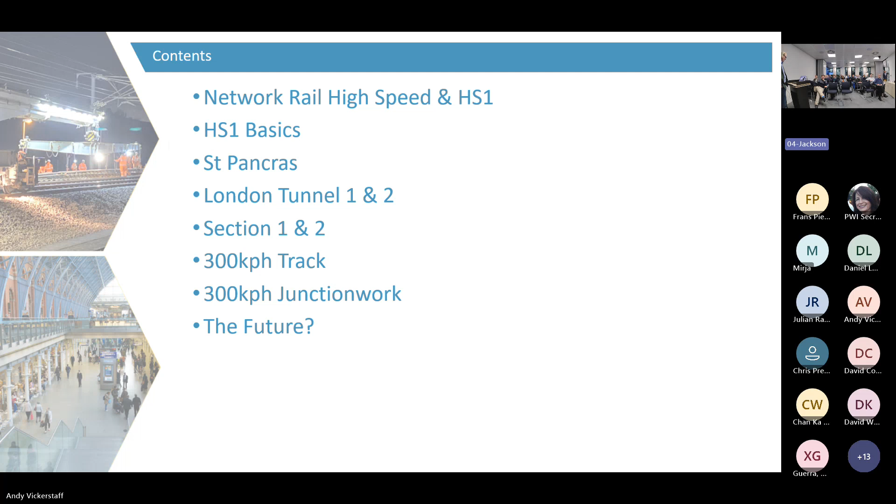A bit around some of the basics of HS1. This is set out so we'll work our way from St Pancras down the line, through the London tunnels 1 and 2, what we refer to as section 1 and 2, which you'll no doubt learn about. What's 300 km an hour, or 180 miles an hour - I'll be metric all the way through because it's a metric railway - what's the track, what are the kind of challenges of that, how do you have junction work at 300 kilometres an hour.

This had to be explained to me as well, but I don't work for HS1. HS1 are owned by these two hedge funds, I guess. Don't ask me about that either.

But HS1 have a 30-year concession to run the railway, which is now generally known as HS1, or probably most of you remember it being called CTRL, Channel Tunnel Rail Link. Under that there are lots of other stakeholders, but the three big ones are us - we are Network Rail High Speed Limited - and two major operators, Eurostar and Southeastern, operating international and domestic services.

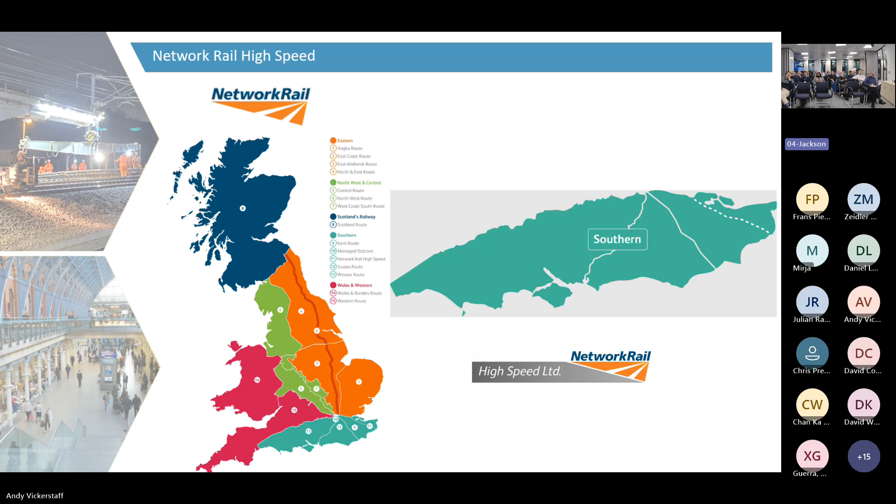So where do we fit in Network Rail? I'm sure many of you are familiar with the regions. We technically sit on the southern region, with Kent, Sussex and Wessex, and this dashed line is us, because although we run through Kent, we are a completely separate company. We are Network Rail High Speed, but we're a wholly owned subsidiary of Network Rail. Don't ask me any more complicated questions about how the financing works.

So HS1, what are the basics? 109 kilometres, that's Pancras International down to the boundary with Eurotunnel, where Eurotunnel, or GetLink as they're now called, takes over. We don't go to Paris - GetLink run the bit from this side to the other side, so if you get your car on the shuttle, that's their bit through the tunnel, and on the other side it becomes SNCF, what's generally called Line 1, the northern line into Paris, servicing Brussels too, which you probably saw on the opening day of the Olympics, or learned about the high-speed network in France as 3 of the lines were taken out. 109 kilometres, 0 kp starts at Pancras, down to 109.9 technically.

Maximum speed, 300 kilometres an hour, 180 miles an hour. 4 stations on the line, 3 of them are NRHS managed - we manage St Pancras, Stratford International and Ebbsfleet International. Ashford is not run by us. Again, don't ask me complicated questions.

2 operators: class 395, that's domestic, Southeastern trains, and class 373s, 374s, the Eurostars, international trains. In terms of gauging, it's gauged to UIC GC for freight at 140 kilometres an hour, and UIC GB1 for passenger at 300 kilometres an hour. 79 sets of NR60 or R260s, whatever you want to call them, what you'd probably see as a standard switch on Network Rail, and then 62 high-speed Vossloh swing nose crossings, which I'll talk about a bit more.

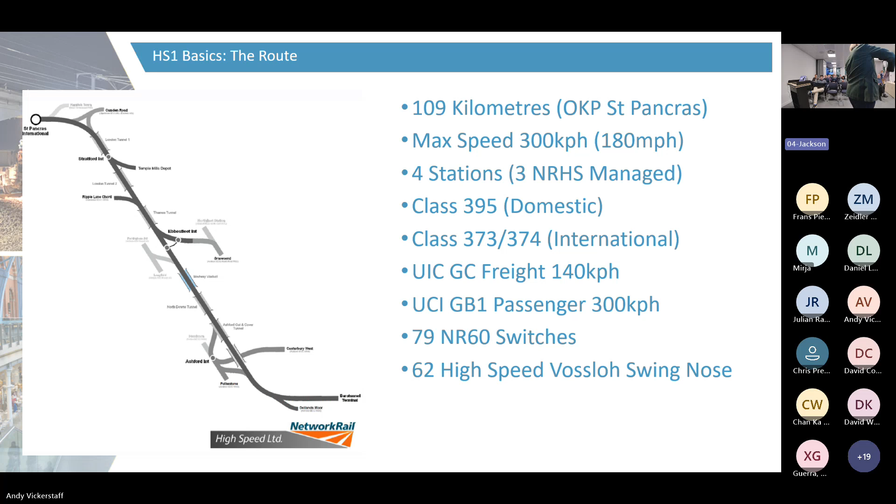So what's the basics? Permanent way - nice glossy photo of some track. I'll talk a bit more in detail about the track, but it's 25 kilovolt overhead line. Everything that runs is an electric train other than some freight. There are currently no freight operations, but we are open and able to take them - they are obviously diesel.

25 kilovolts, twin block sleepers made by Stanton Bonna, original sleepers. One of the great things I was very excited about was that you'll notice there's not a tree in sight, so autumn doesn't really bother me, and having come from the Piccadilly line, that was a great joy. Engineered embankments, lots of the basics are basically very good. It's effectively built almost as an extension of the TGV network, which is why a lot of our signalling and a lot of our suppliers are European suppliers supplying into the European high-speed network.

So, basics. It's Stanton Bonna twin block sleeper, which has nothing in the middle, but it does have a connecting bar in the middle, and ballast fills in between. It's 60 E1 rail, often ground now to E2, but it's pretty much all original rail, so it's all E1. In the tunnels, it uses the same sleeper, but in this embedded booted sleeper design, though it's effectively the same design. Slab track is a Satiba 312V, which we'll talk about more, and there's a Pandrol Vipa in the St Pancras slab, but the main fastening system is what's called the Vossloh W14, which is used on all the sleepers.

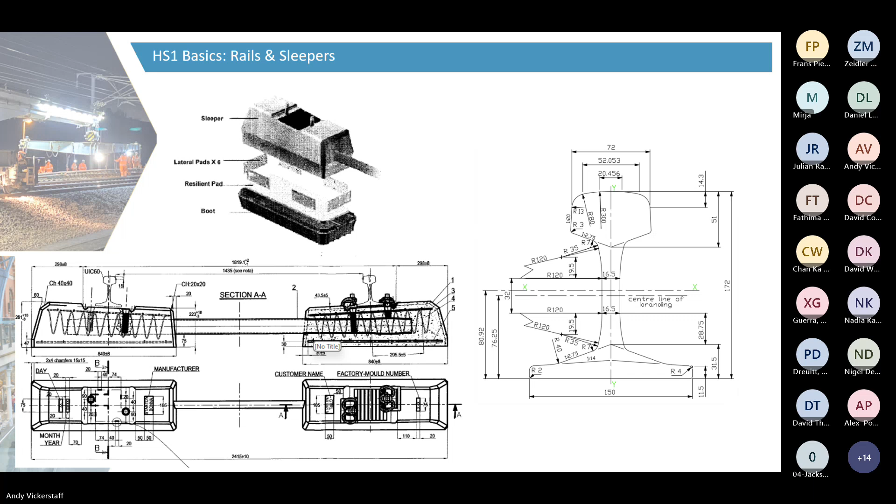So in terms of signalling, it operates with two different signalling systems. One is generally referred to as KVB - the reason it's KVB rather than CVB is so it doesn't get confused with control. Essentially, this is what you would know as fixed coloured signals with lights that go red, green and amber - fixed aspects, sorry, I'm not a signalling engineer.

With AWS or TPWS, mostly TPWS and ATP - and again, this was quite a shock to me - it's all within the low speed areas basically. It's still got 6-hole IBJs mostly, a couple of 4-holes. But that's within St Pancras, where the maximum speed is 80 kilometers an hour, not that any train ever gets up to it, but we'll talk a bit more about that.

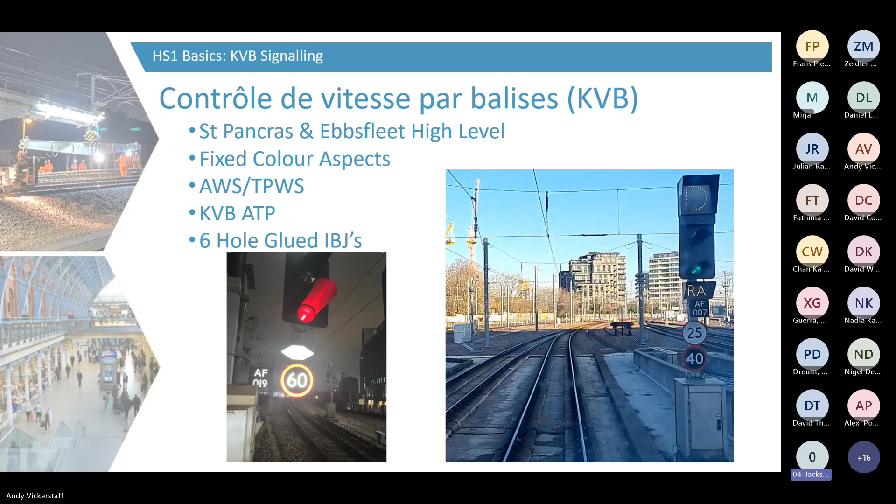These are called the block markers. They're about 1,500 meters long, 950 meters in the slightly slower speed section. Essentially, this is what the driver will see in the cab, telling them what speed to go, or telling them that in the next block you need to be ready to slow down. So effectively you go from one block to the next, one tells you to slow down ready for the next, and it changes and flashes. One of the great joys I discovered on about my second day is that the whole signalling system is completely bidirectional - we can turn the whole thing round, which is very useful in certain instances where you've basically got an up and a down, but we can run the whole thing backwards.

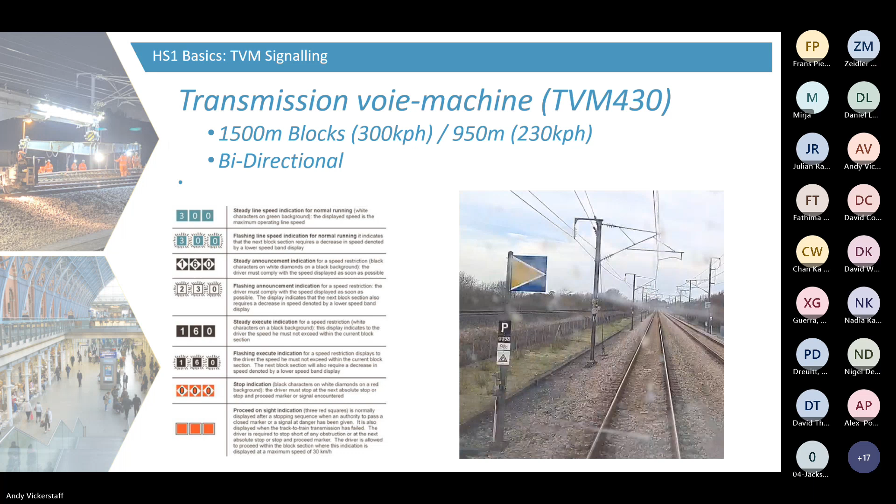So Eurotunnel opened in 1994, and then Section 1 opened in 2003. Section 1 takes you from the Eurotunnel boundary up to what we call Fawkham Junction, when Eurostar services ran into Waterloo. This was before HS1 was built, and when all the press was saying, why can't our trains go as fast as they can in France - because you haven't built a high-speed railway yet. It's called Fawkham Junction, and then Section 2 in 2007, which essentially takes you from Ebbsfleet up to St Pancras through the Thames Tunnel and the two big London tunnels, which we'll talk about.

But so really, when you think about it, obviously all the Eurostars go from St Pancras all the way down. So in terms of tonnages, that first kind of section runs about 20 million gross tons, about 10 million gross tons, and this bit at the bottom is about 6 million gross tons. So not huge tonnage, or certainly for me, I was overjoyed at how low the tonnages were.

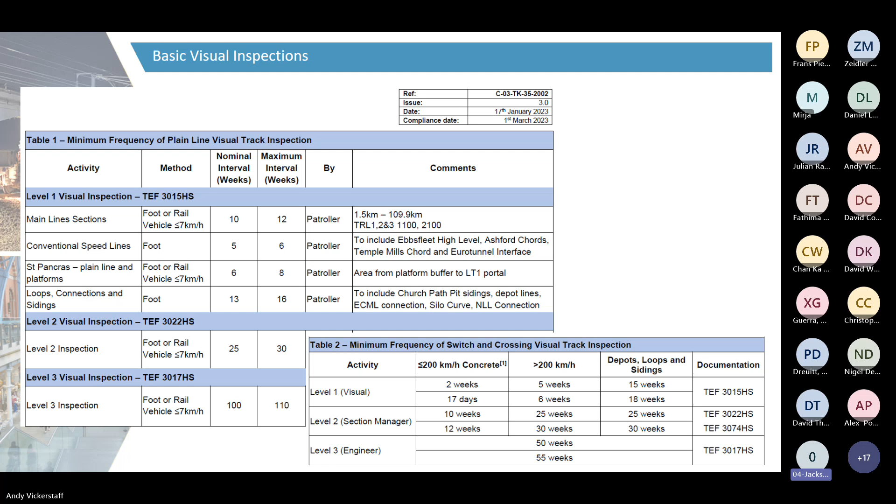Ultrasonics runs every 16 weeks. It's probably a bit overkill, but I have to work on that because we have very few defects at the moment. But yeah, in terms of, you know, when you came from a railway where you were sometimes doing 48-hour patrolling, it's quite a different beast.

So let's start at the top. So St Pancras, this is platform 6. This is the buffer stop, that's where our 0 kp mark is, so everything starts from there. It's a mixture of domestic and international platforms.

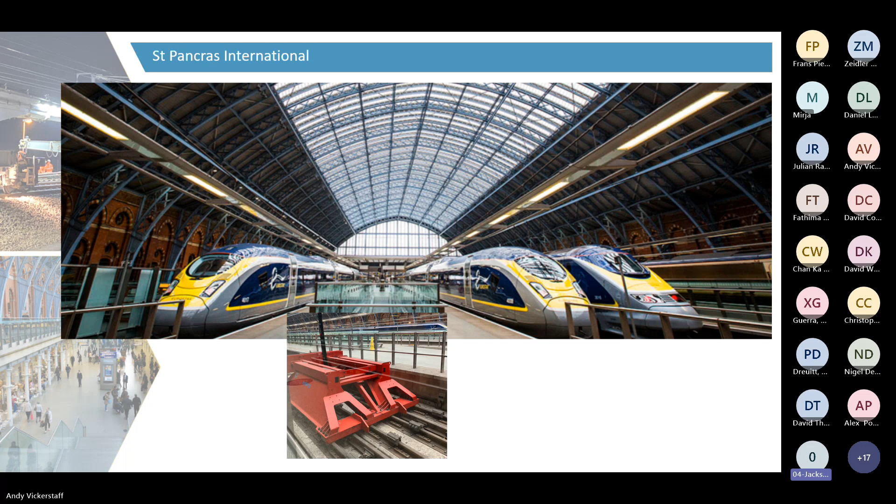Yeah, you can obviously see the original part of the station. There's obviously a lot of work to extend it out the back.

What I really want to talk about, because this leads to a lot of issues, I kind of think about it as at least 2 different railways, if not 3 different railways. So you've seen there's kind of 3 different tonnages, but there's also 2 different signalling systems. And one of the biggest functions is effectively we run a south-east running railway, yet we have a north-facing terminus.

So at some point, you have to get all the trains into a north-facing terminus. So some of these curves, these are about 400-metre radius curves around here, which for a high-speed train - I'll talk about that a bit more - that's a pretty tight curve. So a lot of issues arise, but essentially that is what we have to live with.

The same goes for lots of interfaces here. So effectively, this is King's Cross. This is where we cross the East Coast Main Line, normally referred to as the tin sheds, that goes over. But we also have connections with the East Coast Main Line, and I'm not going to talk about it too much, but you can actually get onto the West Coast Main Line or to Euston just down here. So, you know, there were things that could have been done.

As I say, so there's 400-metre radius curves kind of coming through here, and standard, most of the switches are C's and D's, so they're quite tight relatively for a train which is a high-speed train, which we'll talk about a bit more. So this is kind of the junction work layout.

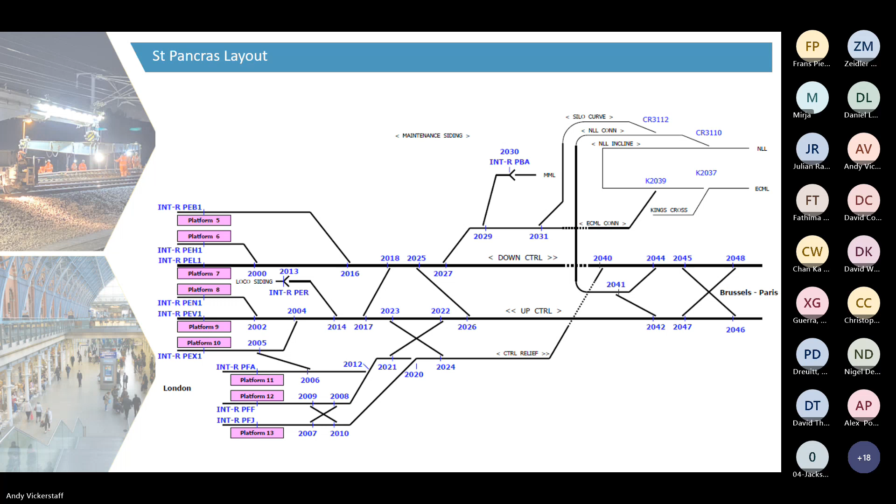So at St Pancras, this is again for me like flange ways of 150 mil - I thought, oh, this is so easy. This is the tin sheds with the big crossover, where there's a floating slab track. So it's ballasted track onto a floating slab track, then into slab track in the tunnels, and ballast beyond that.

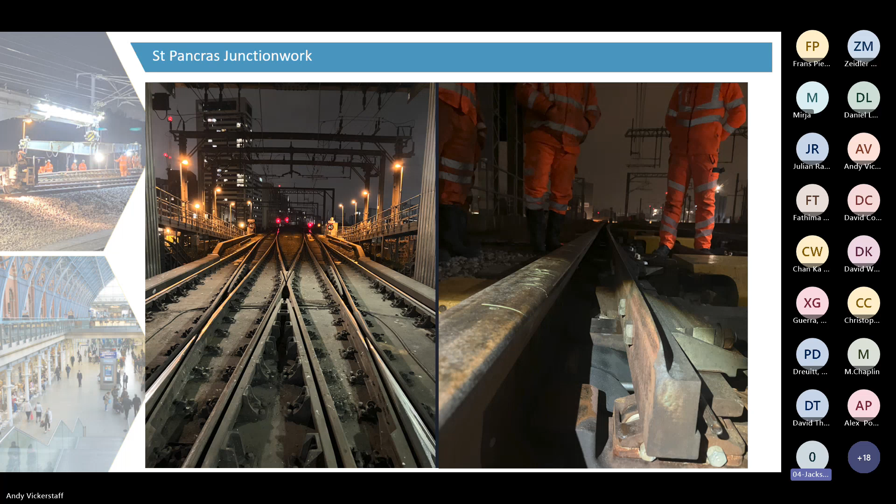We suffer from a lot of issues at St Pancras because the class 374, the new Eurostar, has a very stiff suspension because it's a high-speed train, and to be stable at those speeds, you need a very stiff suspension. But when you try and get into St Pancras, it rips everything to pieces. The old 373, if you've seen them, had a shared bogie in most of it, so it's actually quite soft for a high-speed train, relatively.

And the 395 - we'll talk about one particular issue - is kind of a compromise high-speed train because it operates on our line, but also has to operate on the rail network, so it's a balance. We get lots of 053 failures, so we follow the same standards in terms of switch inspections within St Pancras with RT60s.

We actually had a failure on Tuesday night, fresh off the press. This was what I was doing last night because I'm the only one who can do the mini prof at the moment. Fortunately, it was in the sidings, so it wasn't an issue, but I couldn't really work out how we had a failure on a set of points where a train hasn't been over it for a year.

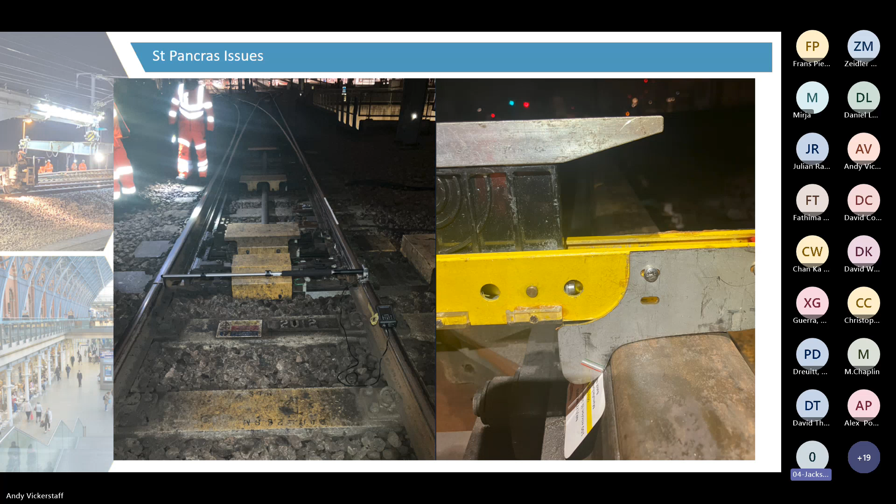Lots of issues. Those of you who are former colleagues will see that I was really delighted to find this stuff when I arrived. Vanguard in the platform doesn't seem to cause me any problems, fortunately.

There's also some interesting alignments - I don't know whether it really shows on this photo, but there are some really interesting design alignments around St Pancras, because of trying to squeeze as much in as you could to give you that kind of flexibility.

We spend more time probably at St Pancras in terms of maintenance than anywhere else because of all these kinds of issues. But fortunately, it has a benefit of at least it's all in one place, so we can get there.

Another great experience for me was you can just drive your car up onto the road and park right next to it. You don't have to abandon it in the middle of somewhere and wonder whether your car will be there when you go.

I enjoyed that. So lots of grinding, lots of 053 failures, where we wouldn't do inspections up there without grinders being available because we'd be banning facing moves all over the place - which, as I told people, is because you can't get a high-speed train around those kinds of curves without causing wear.

On my first day, the ex-colleagues are going to enjoy this story. They said, 'Oh, I got some really bad corrugation at St Pancras,' and I turned up and went, 'Is that it?'

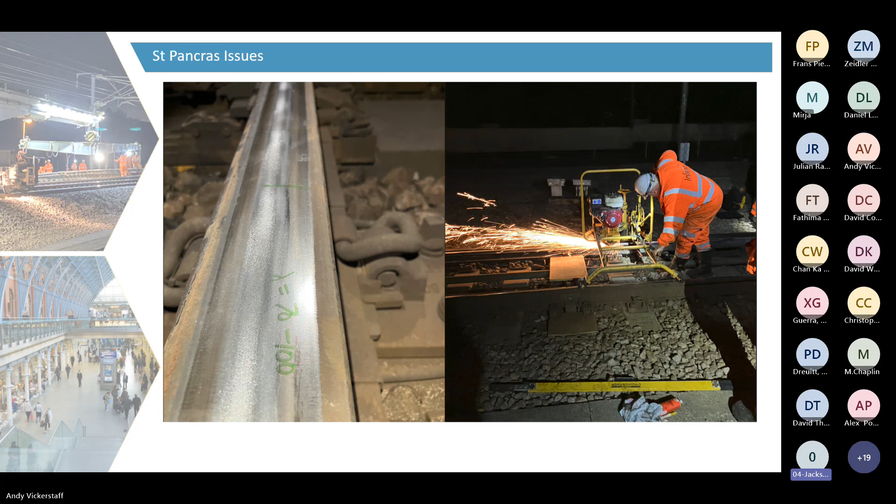But there are a few issues, a few spots up there, but again, nothing like what I'm used to.

So when we come out of St Pancras, we hit London Tunnels 1 and 2 - single bore concrete tunnels, where you go from the ballast onto this kind of booted sleeper effect. London Tunnel 1 is about 7 kilometres, and that brings you into Stratford, where you come out in the open air again into what we call the Stratford box, and then you get back into London Tunnel 2, which comes out pretty much by the Dartford crossing before you go into the Thames Tunnel.

When you inspect long tunnels, we have motorised trolleys, or lumicarts as they're known. I was sceptical of what you'd see, but you actually see quite a lot. Fortunately, because it's not brand new, but relatively new, there aren't that many failures - you're not looking at lots of missing clips, missing pads, that kind of stuff. I'm amazed how much you do actually see.

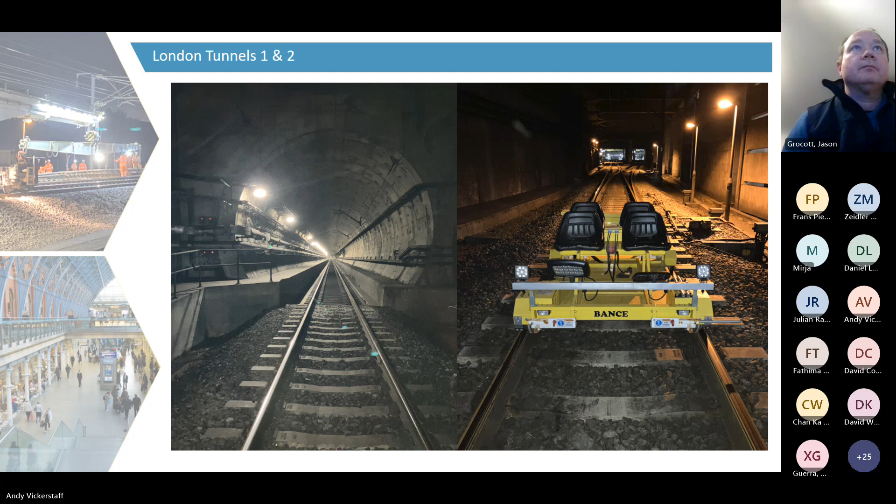So that gives you a bit more of an idea. There's a walkway down each of the tunnels, so again, in terms of evacuation, you can get people out. There are head houses about every 3 kilometres through the tunnels for emergency evacuation.

One of the first problems I arrived to was reports of trains hunting in London Tunnel 2. I did a bit of digging, and some colleagues in technical authority sent me an article saying this has been an issue since the trains were first introduced. As this article says, it was solved - that was October 2010. But we still seem to have issues with hunting in the London tunnels here.

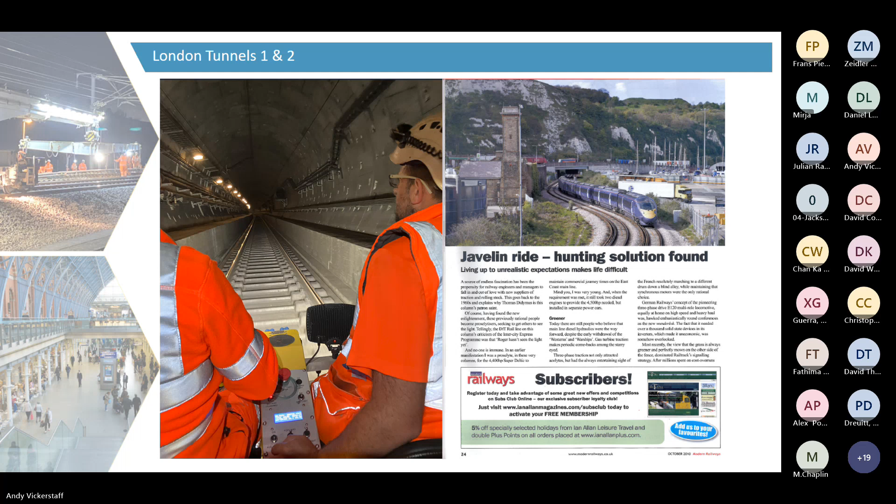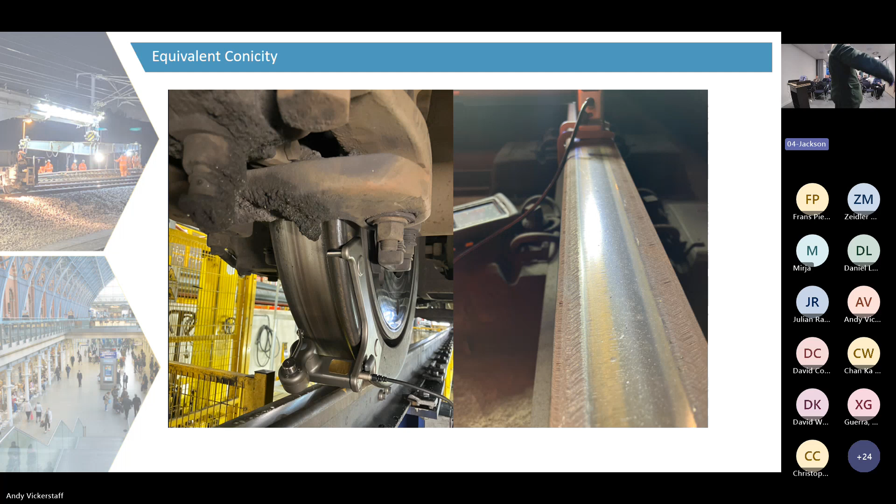With my background, I thought it would be a function of the equivalent conicity. So we need to measure some wheels and we need to measure some rails. So I went and measured the rail profiles in the tunnels, talked about how we identified it, and then went and measured wheel profiles as well.

What you all now have in your pocket is an accelerometer, a 3D, 3-axis accelerometer. So I said, tell me the units that are getting reported, and I will go sit in the train with my phone on the floor, which very helpful members of the public like to tell you your phone's on the floor. And we were able to pick up the units.

This graph has time on the x-axis, and this is just the lateral acceleration. The orange line is a train which does not hunt, and the blue one is one that does. Hopefully you can see the difference - it's quite violent, I'm not going to lie. It lasts about a minute, but the reason I needed a train that didn't hunt is so I can align the curvatures, because off the traces I can say I know exactly where I am and then realign them.

This is zoomed in just to show you, and when we worked it out, it's about 5 hertz, which is quite high if you read a lot of hunting studies. At 210 kilometers an hour, which is what this train is doing, that equates to about an 11-meter wavelength. Quite high. But we had identified where it was at least.

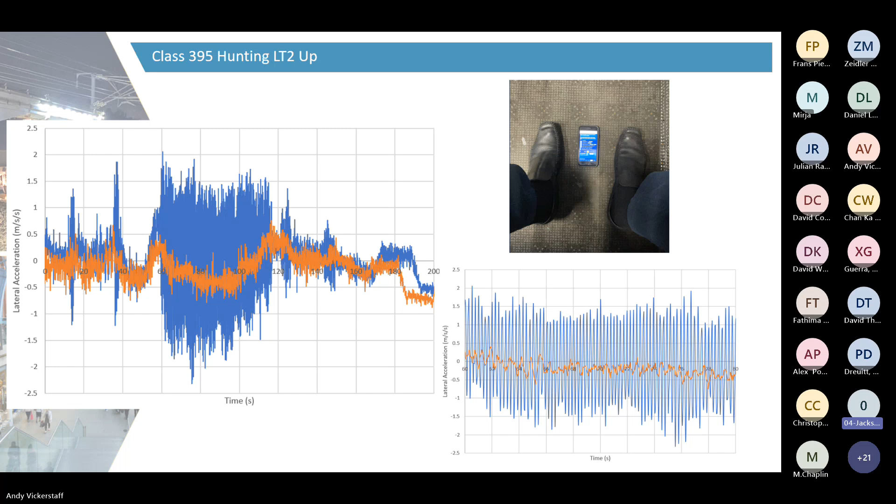When I took the rail profiles - normally, I'll try not to give you a whole wheel interface lecture, but it's normally a function of the wheel shape, the rail shape, and the gauge. Because if you tighten up the gauge for a very small lateral shift, you can set the train off hunting, right? So I said, okay, let's measure the gauge.

I looked at the TRC, so we just use the normal rail TRC to run, and I looked at the data, and it showed a bit of tight gauge. But any of you who work with these trains will know there's quite a variance between trains. In 2024, it was telling me it was 3 mil tight, but in 2021, it was kind of about 2 mil tight. My manual measurements hopefully follow a similar pattern, but they don't necessarily show the same absolute values. So I think there is a bit of tight gauge, but I suspect it has been there since construction, which I haven't been back through yet.

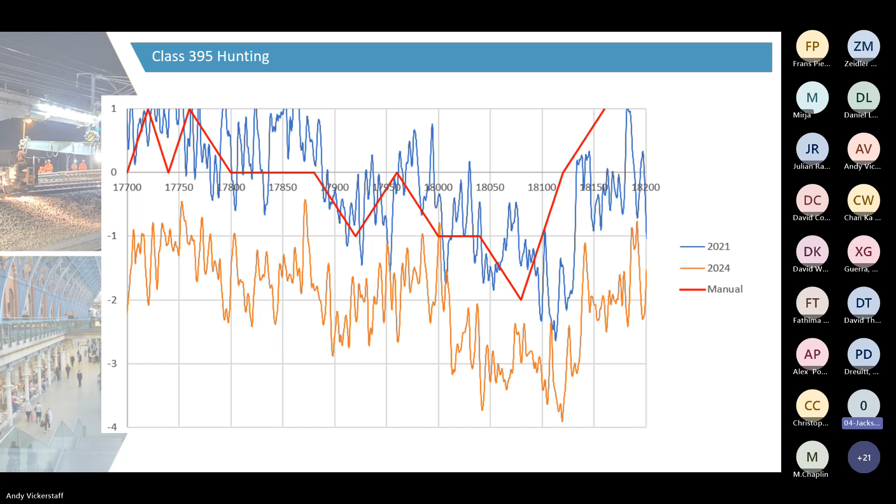When we measured the wheels - I said on my first day, I will eat my hat if they haven't got hollow wheels. And this unit is about 50,000 miles, just about coming. This one is about 180,000 - no, let's get my numbers right, 129,000. So it's about a mil and a half hollow. So there is some slightly tight gauge, but well, you might want to turn your wheels a bit more.

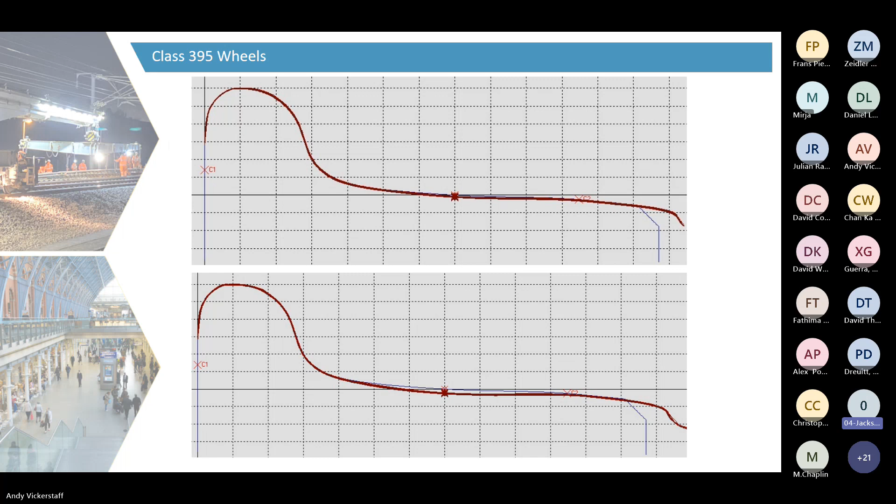Once I worked out that I now had this 3-axis accelerometer in my pocket, I started going on other trains. So that I don't have to talk all the time, I thought we'd play the game of which mode of transport is this - I've given you the axis. My phone is effectively aligned so Y is pointing forwards, that is positive, X is lateral.

This is the lateral acceleration - apologies, wrong color there. And I've given you a speed profile of this mode of transport, just to try and help you work out what mode of transport this is. Given it's a railway that hunts... Docklands.

We have an office in Stratford that I often get to via Lewisham, and there's quite a long straight there, which I know is a common problem with DLR straight hunting. I recorded one train - this is a rough calculation, I'm sure you all know this, and I can see Tom's here so he'll tell me I'm wrong - but it's more like 1.5 hertz. That wavelength comes out about 9 meters. Is that about right? Yeah.

The kind of example I use is the class 395. It's a compromised train - it's a high-speed train, but it's actually got a relatively soft bogie. The DLR is the other end of the scale, with an extremely soft bogie and very low speed, but in order to get around those 40-meter turnouts at Poplar. So the 395 is the other end of the scale, but it's effectively the same issue - at a certain speed, all trains can hunt and can be activated by equivalent conicity.

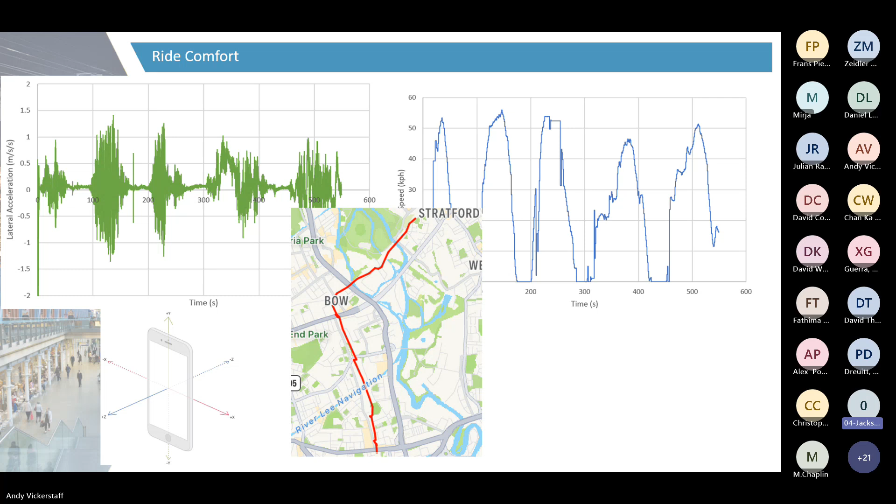This one is another one - I couldn't quite plot them all on the same axis, but look at the Y acceleration if you want to try and work out what this is. This is not a railway. Bus? No. Motorbike? No. Cycling? Only way out of this is... it's a plane taking off.

I was going to Frankfurt for a wedding, and the air stewardesses look at you very strangely when you put your phone on. Luckily, yeah. I went to a conference a couple of years ago all about ride comfort, and at the time in my role in LU I concluded I don't really care, and that's basically because there is so little you could do about it - speeds are much lower.

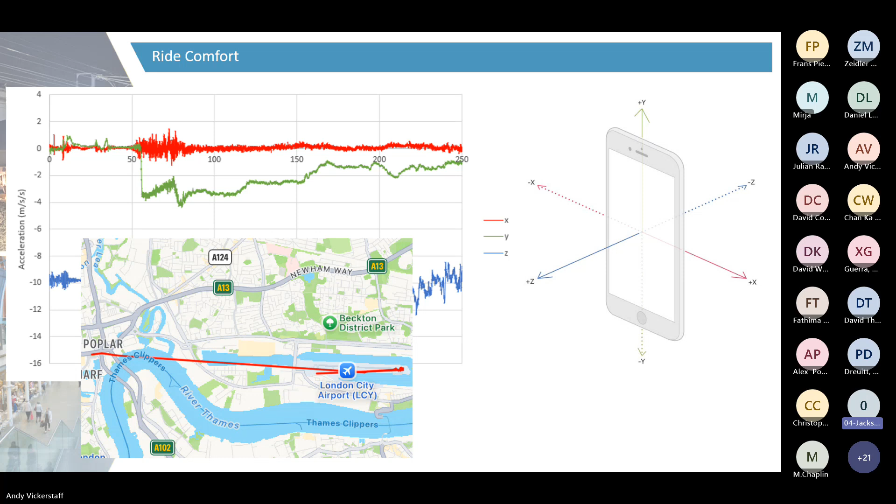I always had this argument with Malcolm Dobell, who many of you know, that we should change the braking rate depending on the time of day, depending on how cramped in people were, because when they're cramped in they're not going anywhere even if the longitudinal braking is very hard. But anyway, this is quite fun just to show you - when you take off in a plane, this is out of London City so it's quite a small plane, but you're kind of getting 4 meters per second longitudinal acceleration.

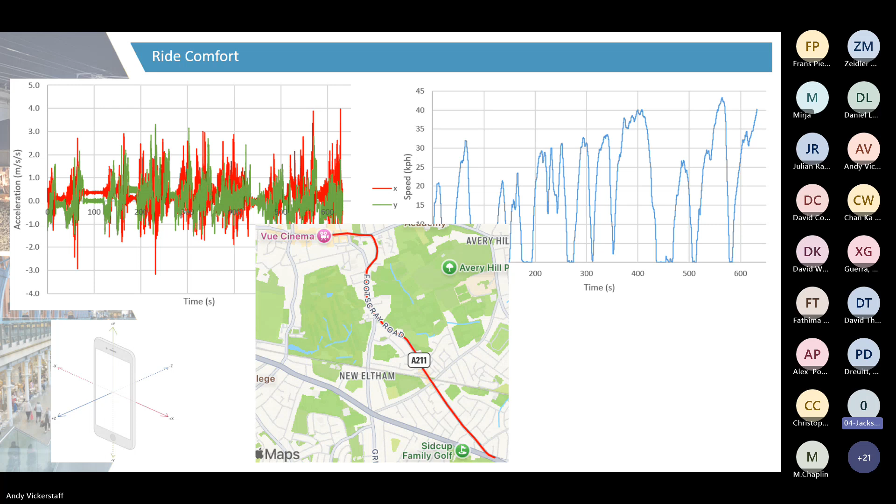And this is the last one - that's got the X and the Y, but I also plotted the speed in kilometers an hour. Hopefully you'll see it starts and stops a lot. Central? No, this is the bus from Eltham to my house. Just wanted to show - this is the point Felix Schmidt made at that conference - that in railways we're often told our ride comfort is so crucial, but people just get on a bus and it tries to throw you on the floor pretty much every 500 meters. So when we're thinking about it relatively... anyway, that was a bit of fun once I discovered what I could do with my phone.

So as we move down, we get to Stratford International - sorry, to give it its proper name. As I said, we come out of London Tunnel 1 into what we call the Stratford box. This is where we first start to see high-speed S&C. I was trying to fit it all in, but effectively you've got international and domestic platforms, and also coming out the middle is this chord which goes up to Temple Mills, where the Eurostar depot is.

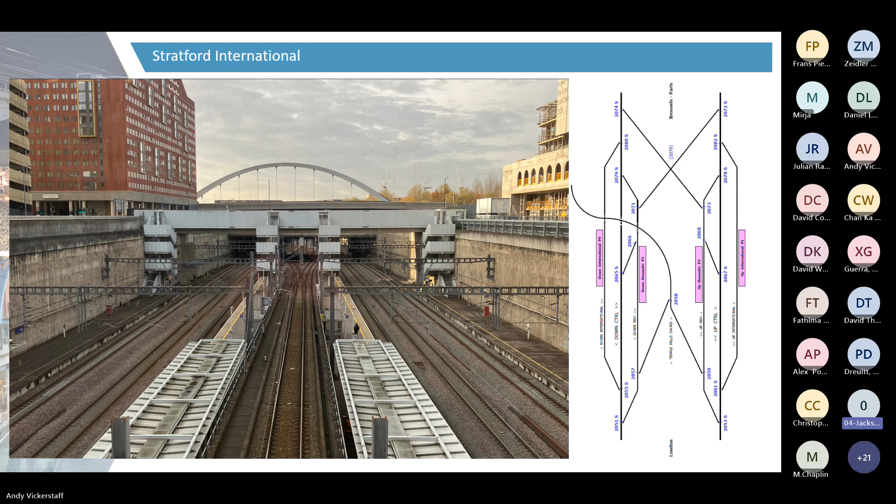This was taken - we often use the international lounges or departure lounges for events, because no one else does. So I was stood there going, oh this is great - if you're a PWI engineer, this equal split out the middle is absolutely beautiful. And no one else seemed interested. Anyway, I thought some people here would appreciate it.

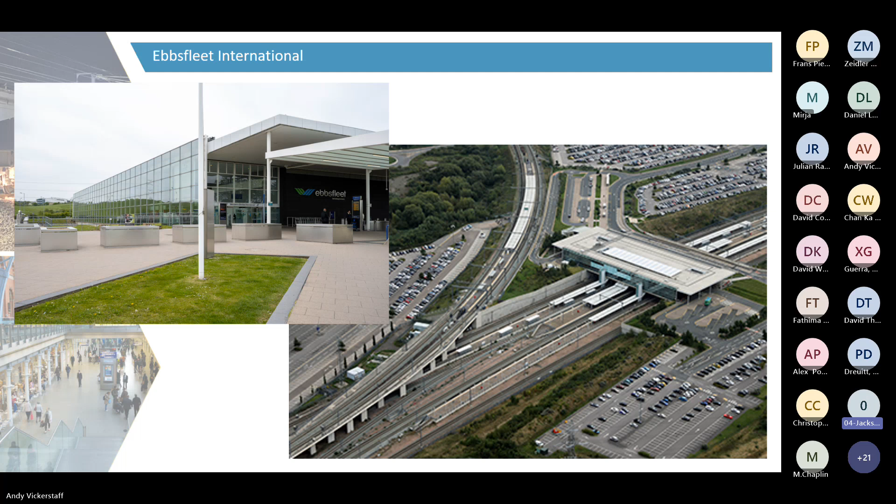Okay, so then you get into London Tunnel 2, which is exactly the same construction, but takes you out to Ebbsfleet - Ebbsfleet International. So Ebbsfleet is where we start to divide. This is the main station, which takes you down to the coast, and this is where you go onto what we call the high level platforms, platforms 5 and 6, which take you off onto the North Kent lines and down to Ramsgate and Deal.

So just beyond that is our infrastructure maintenance depot, a place called Singlewell, just outside Gravesend. It's the Gravesend East exit, if you can find it.

Where we have got a stabling yard, see a lot of spares, not all of our spares, they're dotted out down the line. This was a nice corporate shot - I didn't take this photo of this rainbow out by the MPV, but it's a very good space again, going from depots which are very cramped where you can barely get all your stuff in, to having a lot of space.

Our MPVs are actually operated by Balfour Beatty, so there's another shed just down here. They are owned by HS1, those MPVs, and operated by Balfour Beatty, but effectively we're the only people who use them.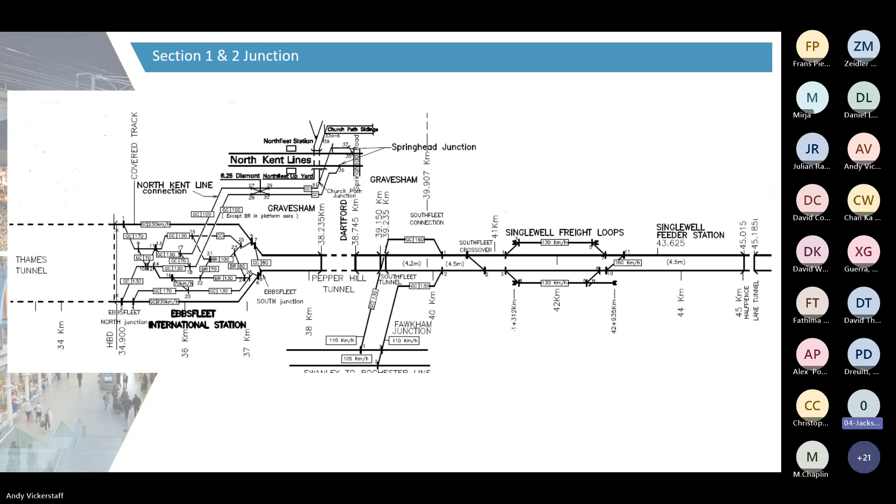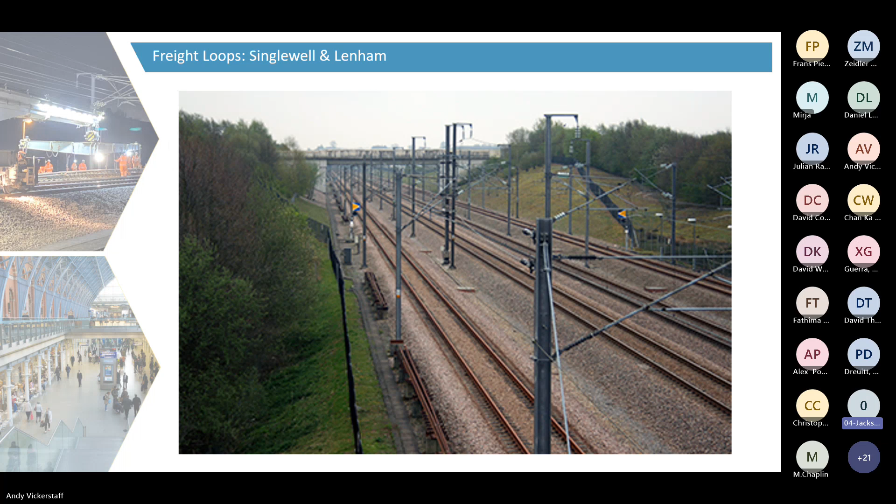So we also have 2 freight loops. As I say, it is open for freight. There is currently no freight operations, but the idea was it would be useful for freight. So we have 2 freight loops, one at Singlewell and one at Lenham. I'm sure you all understand what a loop does - just to get the freight out of the way so the high speed trains can go through. But again, they are quite useful in incidents when you can stick trains out the way.

Okay, so now on to the really interesting bit. So this is kind of a plot of the range of curvatures on the high speed network by percentage and by density. You will see a little cluster of 400-meter radius curves - they are all within St Pancras. If you get out, there's a couple of 2,000, but that kind of 3,000-meter radius curve is kind of the minimum. You could do your Cant deficiency calculations, but for 300 kilometers an hour, that's kind of the minimum radius you can have, even with kind of 90 mil.

One of the first issues I identified was that there's actually quite a lot of spots of voiding ballast. So I went out, as you all do when you're new, and sat in the front of a cab. Quite a lot of issues with spots of voiding ballast, which I couldn't quite work out. My first big question was, is this isolated places where you've got UTXs or changes of stiffness? I concluded it's actually quite random, and we'll talk about what I think is happening there.

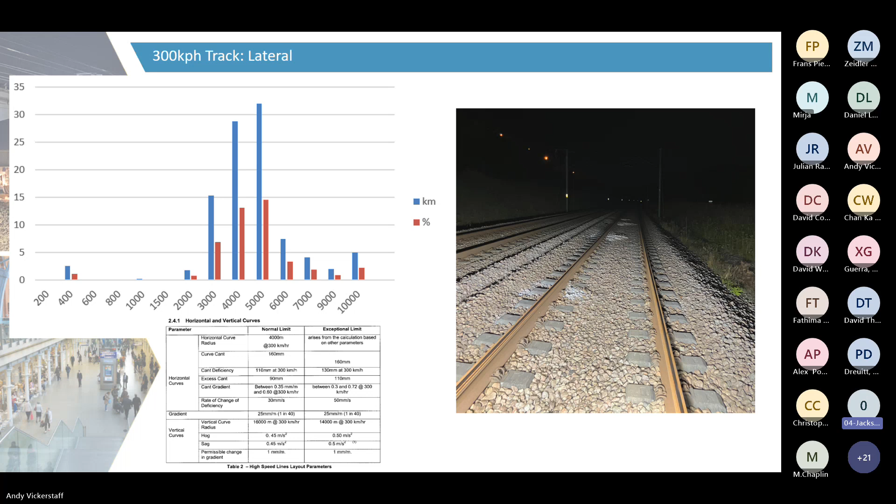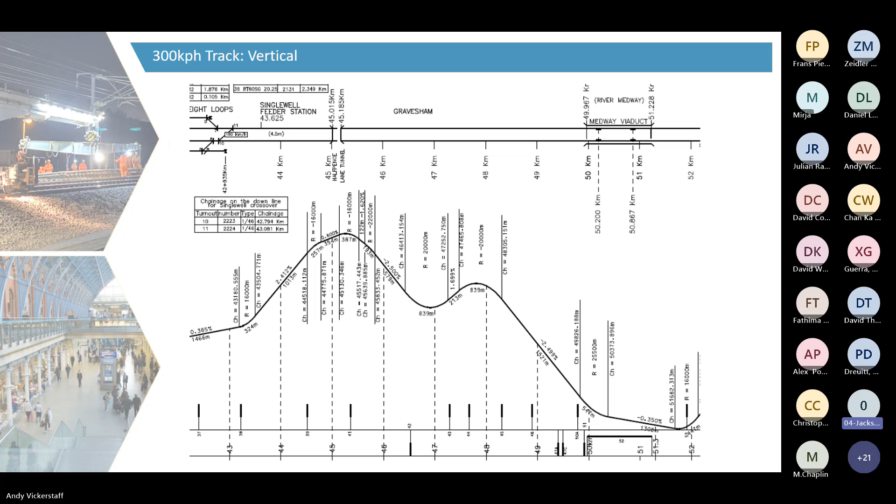So in terms of the design, if you go by the design rules of high-speed railways, curvature, yes, it's kind of within what you would expect, but the vertical is really quite high. It is really on the edge of the limits of what is acceptable for high-speed operations. If you go on it, if you sit in front of the cab, but it really is quite a roller coaster. Having lived in Kent and cycled around it, it is very up and down. So there are a lot of vertical geometry issues - well, I think they relate to issues, but yeah, it's really right on the limits.

So in terms of 300 kilometer an hour track quality, this is a piece of work I did. I kept saying, well, where is all the historic track recording data? Because that will show you over time what is happening. And I finally found it, and I spent 4 days writing some code to pull it out. So this is basically, as you can see, 2004 up to 2023. There's a bit of a gap, obviously, where I don't know where the data is, but we'll try and come back to it.

But in terms of trying to work out overall track quality, this is actually for the 70-meter top. Again, in high speed, we talk about 35 and 70-meter wavelengths, because at those speeds, the wavelengths are completely different, even if frequencies are the same. But yeah, I've concluded that overall our vertical track geometry has not necessarily been maintained as well as it could.

Be very careful what I say. Not worried about it from a safety point of view, but in terms of overall track quality, there's been quite a lot. I think we have tamped sites where we think there's a problem rather than looking at the overall quality. But now we have all this data, we can see.

Obviously this is in 200-meter sections rather than eighths of a mile. But you can see some sections show a steady degradation. Other sections you can see where we've had issues and we've tamped, so we've brought it back down again.

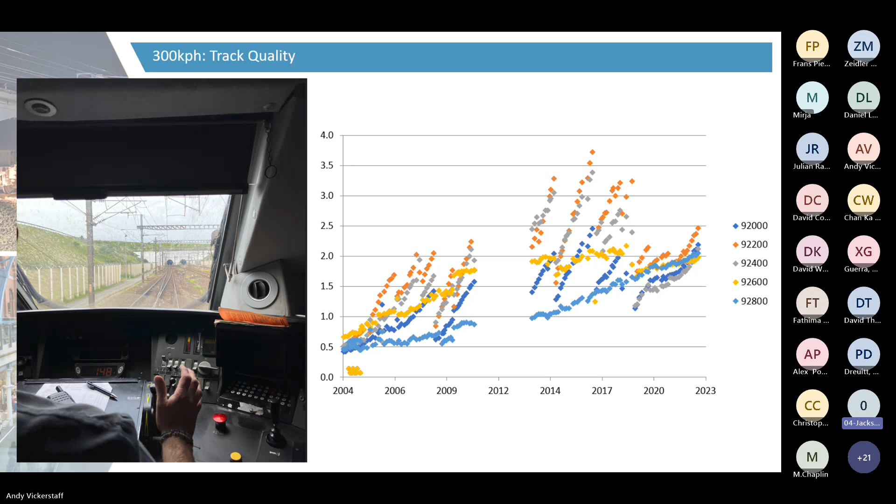In terms of overall track quality, ballast condition is the biggest concern. So this piece of kit that's been brought in - I don't know whether it's been used elsewhere - it's called a PANDA. You dig into the ballast and measure the response.

Once you've dug this big spike in, you can stick a camera down, like an endoscope, and you can see where the ballast is clean and dirty. This is what we've used to look at our ballast cleaning campaign, which is the first real big renewal we're going to do in 2 or 3 years.

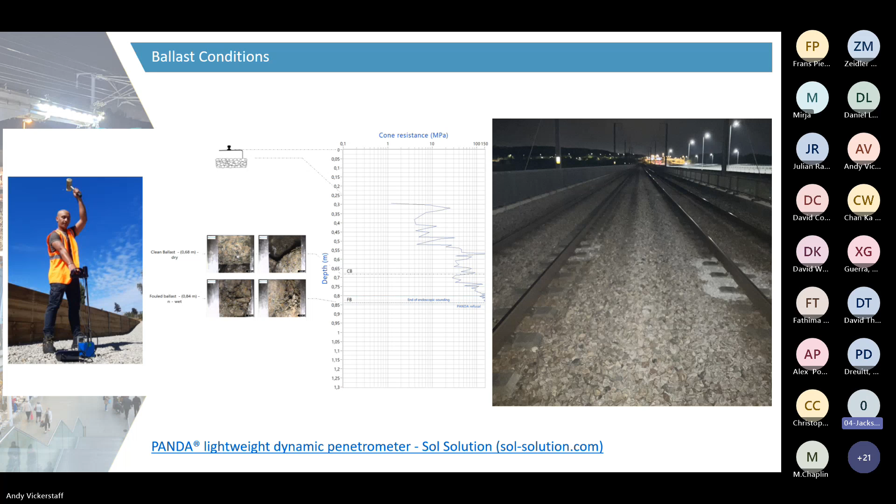If we talk about junction work - this is quite boring - but this is our longest high-speed switch. This is a Vossloh 1 in 46. I've just put some numbers on there: that's 126 meters from the toes to the crossing, which we'll talk about, the swing nose crossing.

That's got 11 supplementary drives on it, at a minimum, with the tightest radius through the turnout of 3,550 meters.

So again, when you're looking - I came down here to Aldgate to have a look off the end of the platform to see my favourite. When you're talking about A's and B's, where point rails become splice rails, this is very much the other end of the scale.

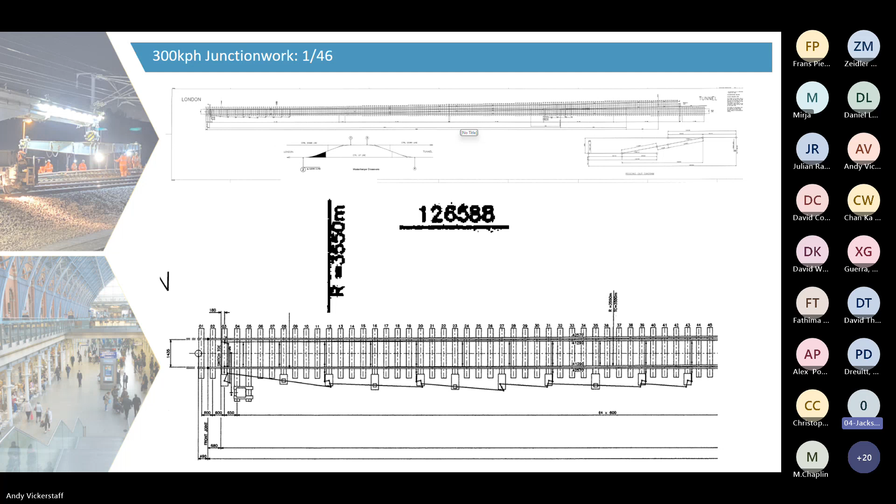A range of 1 in 46 is the quickest, so that's 300 kilometres an hour on the through route, 160 kilometres an hour - 100 miles an hour - on the turnout. Generally used in locations for crossovers.

So again, first thing, when you're new in the role, you're like, what are the most catastrophic things that could happen? Probably a derailment on a high-speed set of S&C, so let's get out there and have a look at those. And what I thankfully discovered is that they are absolutely beautifully undercut.

So these are the switches, but you can see there's clearly no contact on the switch tip. They're so beautifully undercut - I could sleep that night.

But yeah, this is one we replace. This is on a flatbed. You can see you need 3 or 4 wagons to get one on because they're so long.

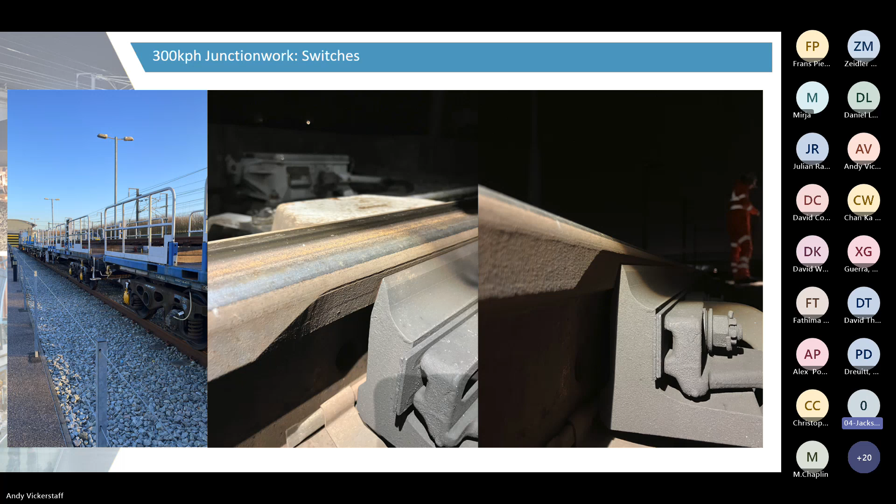So at the other end, obviously you can't really have a fixed-nose crossing at those speeds. You need a swing nose crossing. Again, fairly standard in France, across the whole of Europe. The idea is effectively you create a plain piece of rail by moving the nose of the crossing.

This one is in our yard - it was just because I could take a nice photo in the daylight. This is on timber; none of ours are on timber, they're all on concrete bearers. But in France, there are sites still on timber bearers.

Fairly similar to a switch in terms of its operation. It causes some issues with detection because you have to make sure they are both detecting, and they are both detecting in the correct position.

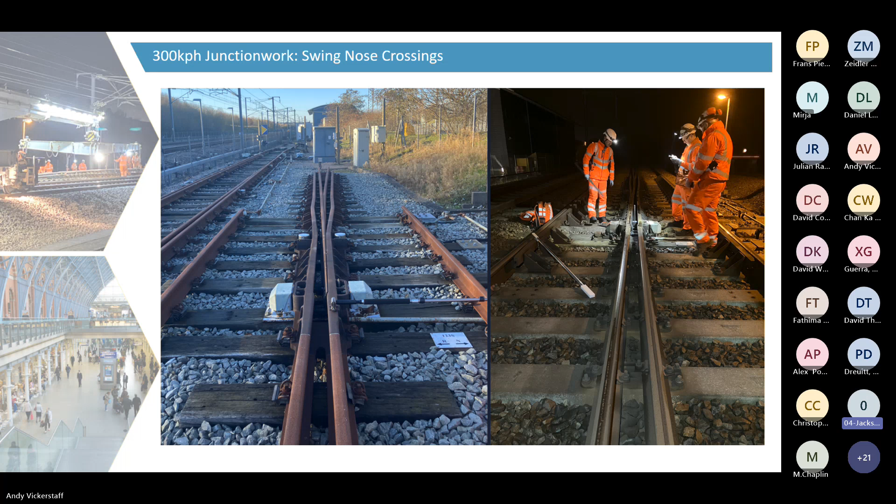But yeah, it's pretty well designed, as I say, and allows me to sleep at night.

The first thing I did was show a power spectral density, a PSD graph of the frequency. It's coming out about 50 hertz. I said, well, that is one of two things: either you have got corrugation or the whole thing is bouncing up and down. I saw the video and went, well, I think I know it's number 2. So quite a lot of issues.

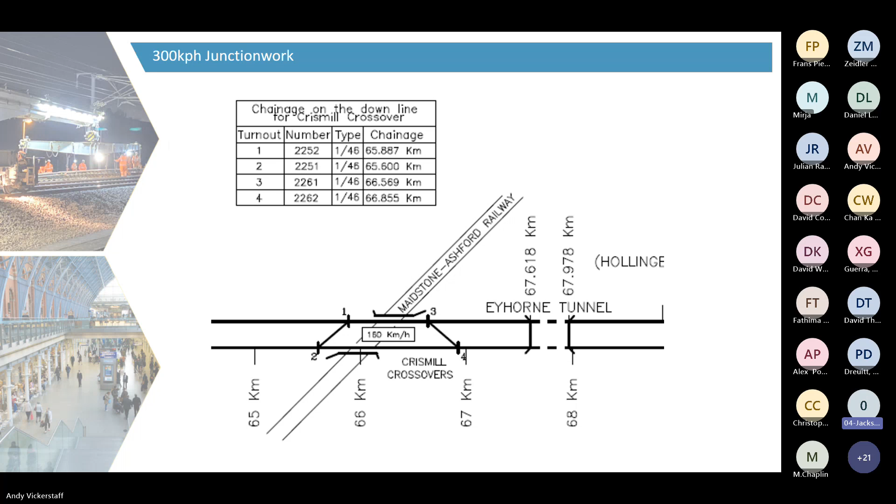There was also a lot of wear on this crossing. Again, it had been replaced by the time I arrived. One of the things I've been working out is how you measure the wear on these, because my MiniProf, which you've seen in all the photos, can't necessarily get all the way round. However, what you do have is this series of ribs going down, and what I'm trying to work out is whether I can use those as a reference. This is a casting, obviously, but you'd like to think they weren't too far off the original cast.

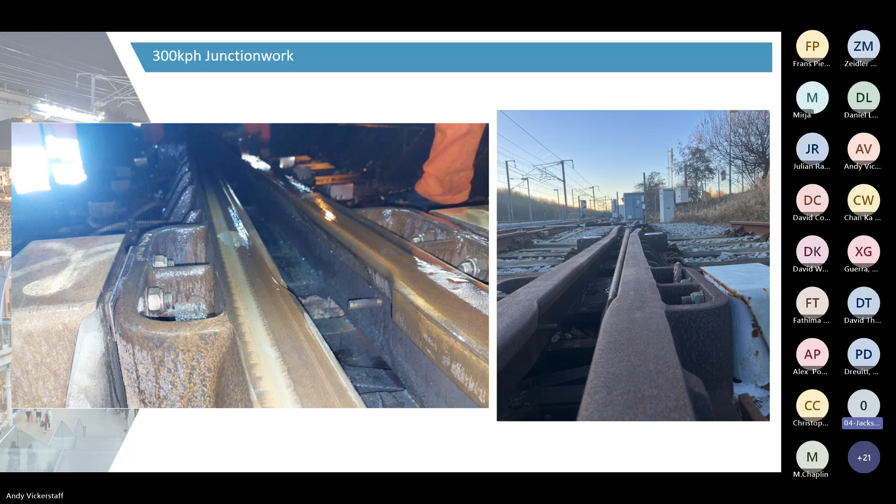These are the photos for the report, but hopefully you can see how it's probably been overground over the years. The cant measured through it was about 8 mil, given it should be a flat junction, so I think it's been totally overground over the years. Trying to work out how we can monitor swing nose crossings.

Okay, so that's Crismill. That's one of the, we just sort of have strategic crossovers, because it's totally bi-directional. We just have a series of crossovers in various locations so we can work around issues if we need to. They don't serve any particular purpose, which again is quite an issue in that they don't really get run on the turnout. They only really get used on the through route.

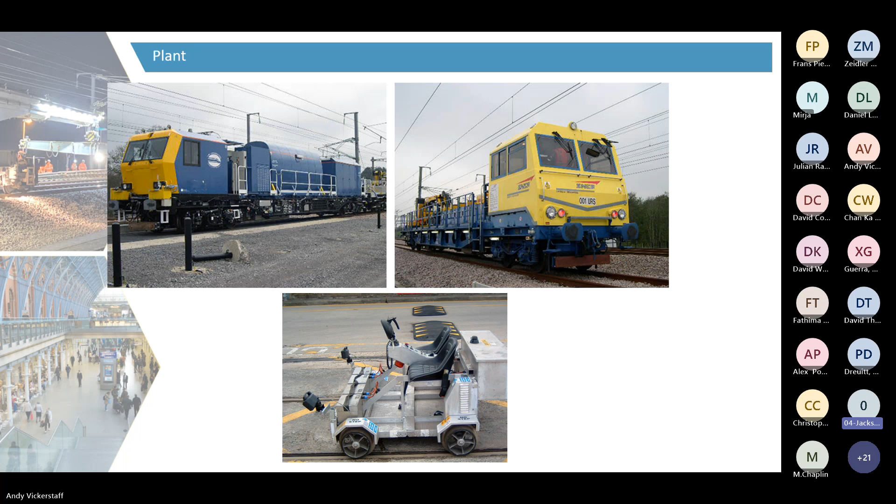Just to mention some of the plant, we have 5 MPVs, or 5 pairs of MPVs, because they work in pairs. They're all signalled with both KVM, TVM and KVB, so we use them for all kinds of things. We have a STRAM as well, which is mainly used for overhead line. It's got a crane on it and various bits and pieces, and then the Illumicarts, which we do our basic patrolling on.

As rail management, the first thing I obviously wanted to look at was rail defects, and I was pleasantly surprised - they are pretty low. Lots of reasons for that, but there's been fairly intensive grinding over the years.

We bring in 2 machines. This is Speno, is it RR24? Because it's got 24 stones. This is the S&C grinder, which, for me, having been used to arguing about 8 stone machines, is slightly different, with a 48 stone machine. But yeah, kind of working on what is our overall grinding strategy. Rail defects are pretty low, but we've got sites with RCF - nothing severe, nothing we're not managing - but how do we manage it overall?

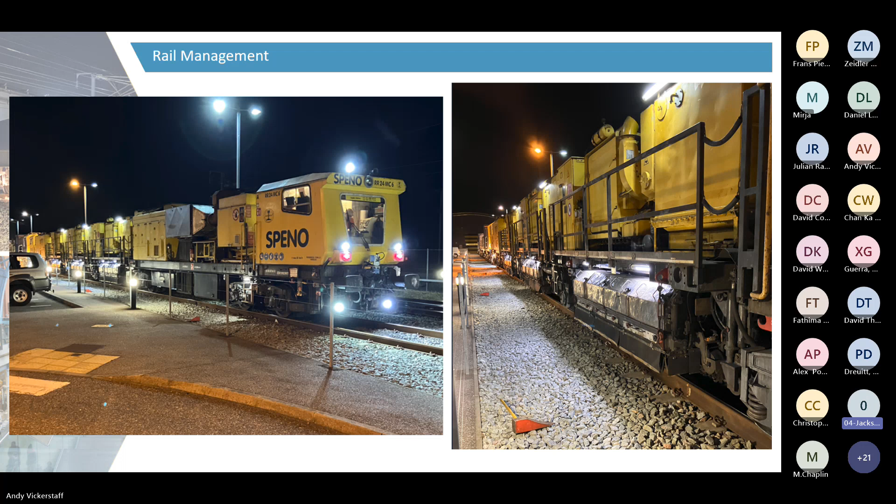The one issue we have is that, yes, there are slight differences in age of the assets, but effectively they were all built at the same time. In most railways, you are in various states of this across your network, but we're potentially in the same place everywhere. There are some slight differences, but overall it's not exactly massive. So we've just finished our control period 3 - I'll talk about it a little bit.

So we have control periods, similar to Network Rail, where we have to go to the ORR and tell them what we're going to do, but we're a year behind, basically to detach us from the same process. But yeah, so we are about to finish CP3.

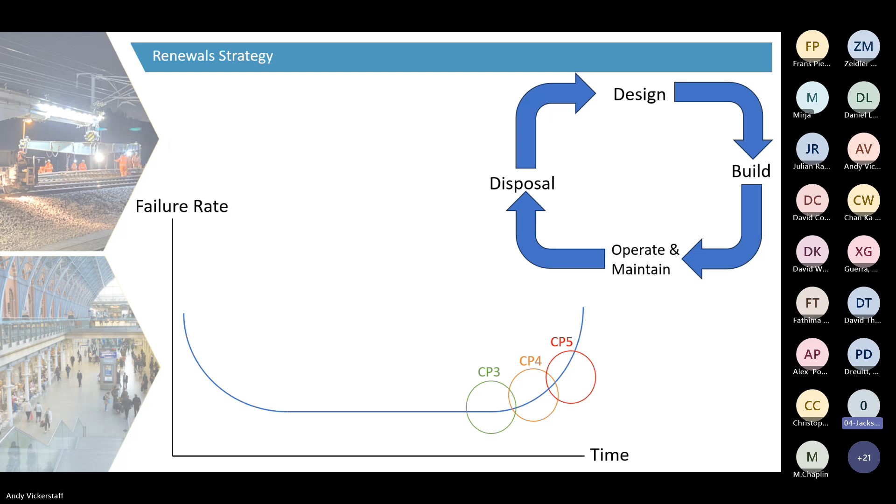So HS1 is really set up as an operation and maintenance business, not a capital renewals business. And I said, well, you've got 5 years to turn it into one, because that's where we need to be.

Well, probably less. But again, kind of trying to do some work on what is our overall renewal strategy. We have got ballast cleaning planned in year 3, so we're about 3 years away. We've just let a contract to do 30 kilometres of ballast cleaning - it was something I'd never heard of. There's no point in cleaning any ballast on the underground because you just dig it all out. But we've done a bit of work.

So as I say, ballast for me is the biggest single concern. But again, if you're doing the ballast, should we be re-railing at the same time? We have some data on the rail, but pretty much, other than isolated sites where you might have 7 or 8 mil headwear, about 3 mils is the biggest I've seen in most locations. So not particularly worried about the rail. And rail you can change fairly easily, although at the moment we don't have a method of doing it in the tunnels.

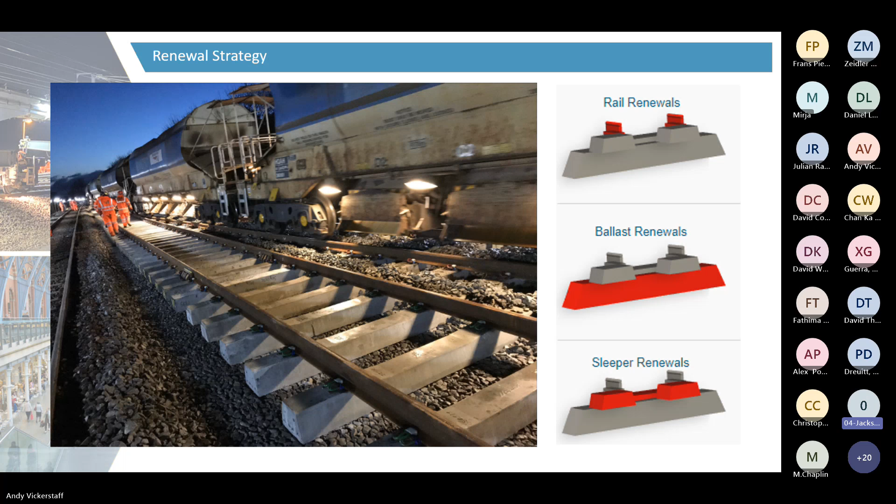But we will. In terms of sleepers, we had a few sleepers taken out and just looked at, and they will probably be there longer than I will. They will last forever by the looks of it.

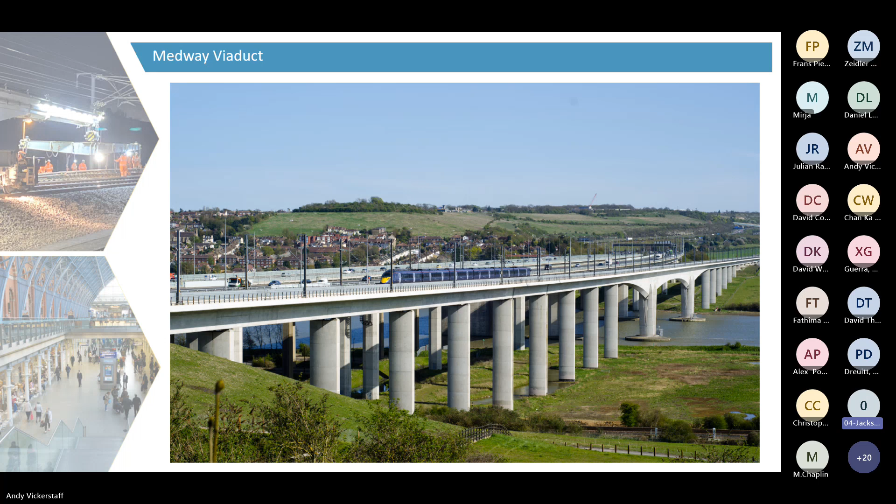But yeah, obviously we go under the Thames, we go over the Medway. It's quite a long bridge, and the big job we did at Christmas involved what we refer to as long expansion joints - this being a bridge, it has to move and contract with the temperature. This was kind of a great example, really. This renewal has been planned since 2021, but being an organisation which hasn't really done big renewals, every time you'd ask if we're going ahead, people would normally say no.

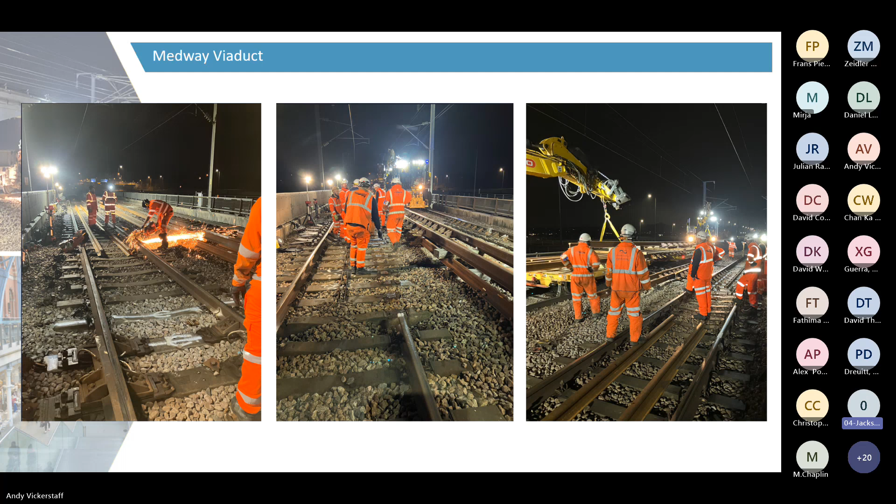And so this year we finally did it, but the rails are 2021 rails that have been sat in the yard. So yes, this was what I spent my Christmas Eve doing. We changed them - they come in 2 pairs, so there's 8 to change in total. It wasn't a huge job, but again, in terms of turning it into a capital renewals organisation, it was a good job to demonstrate what we can achieve.

So we also have, that's part of the funding, a separate research and development pot, which was like, yep, I can spend all that for you, no problem.

This project was already in flight, so this was some lateral track stability testing that was done in Southampton in the National Infrastructure Lab. Because the theory was, well, with a twin block sleeper, in terms of your lateral track stability and your prevention of buckling - my theory was, well, it's got two edges, so surely it should be better than a standard sleeper. But until we had some evidence of that, I wasn't brave enough to change the whole standard.

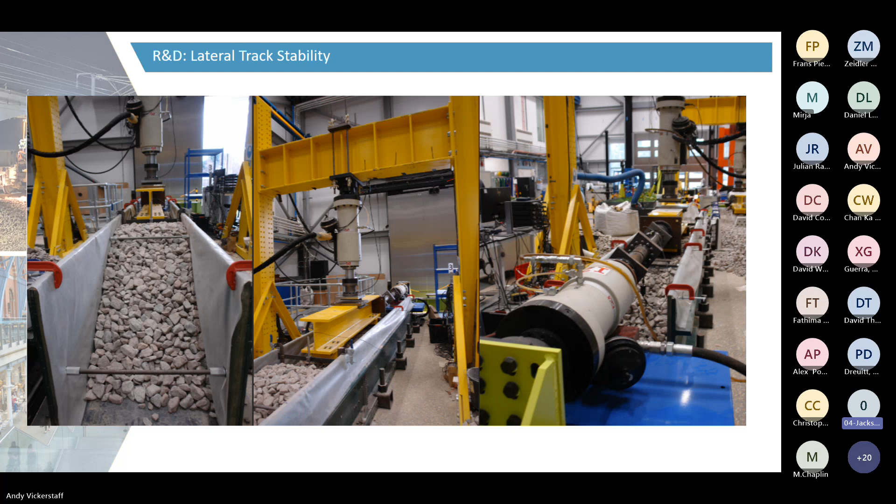But this graph, if you've seen these before, is basically where once you have conditioned the ballast and put it down, you then start pushing it sideways and seeing when it slips. So if you go with the standard G44 sleeper without a USP, and compare it to a twin block at a 3 mil deflection, which is kind of the first point you normally get a reading, we're about 20% higher. They did test it with some USPs - don't have USPs fitted, but there's a whole suite of testing that's been done by Darren Sharp.

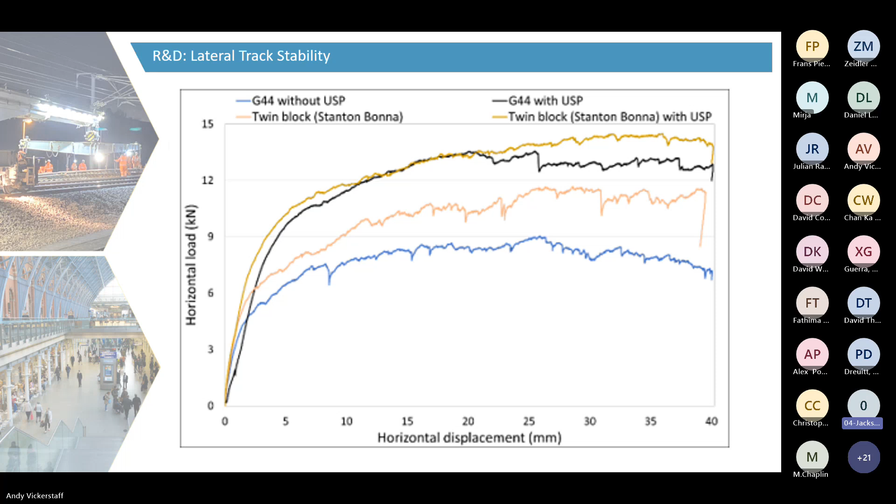So it's useful to compare - if we had USPs, would we get much more? Yes, we would, but at the end of the day, am I going to retrofit USPs to the whole line? No, but it would be useful in the future. We've just got this report, working out for our sleepers, can we push all those prevention of buckling numbers if we got 20% greater lateral stability.

I've also had various projects running on the two class 374s. We have the MoniRail kit fitted, which is actually accelerometers on in-service trains. Again, it was kind of an R&D project that no one really thought about what we're actually doing with it, but it has shown some really interesting stuff, though we haven't worked out how we use it. Am I prepared to push out RTRC runs on the basis that I now have this on board?

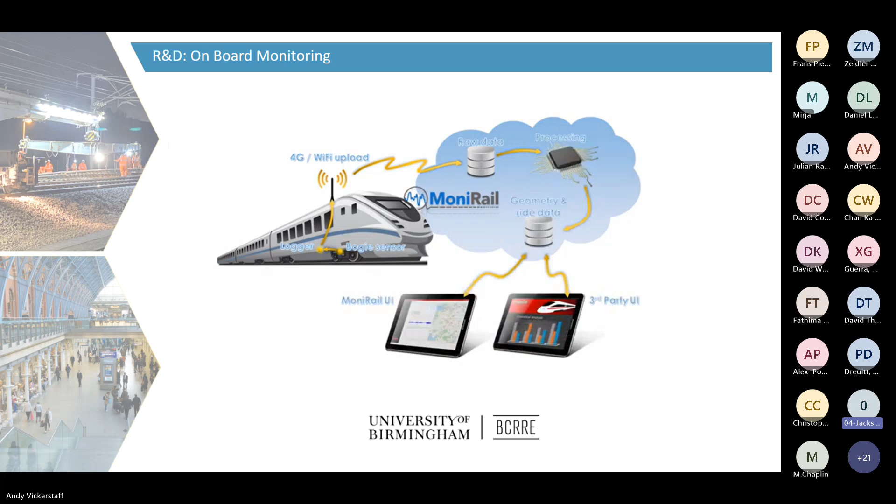What are the differences? Does it measure some things better? Does it measure them worse? Are we interested in absolute values, or is the relative enough? What happens if those two units come out of service? All the kind of things you've got to think about.

Let's say we have just finished this. This was published on the 6th of January, so this is nothing that isn't in the public domain. The lower fee - they have asked HS1 to charge a lower track access charge. Eurostar are very keen on that. They tell us our track access charges are 3 times what they are on the continent.

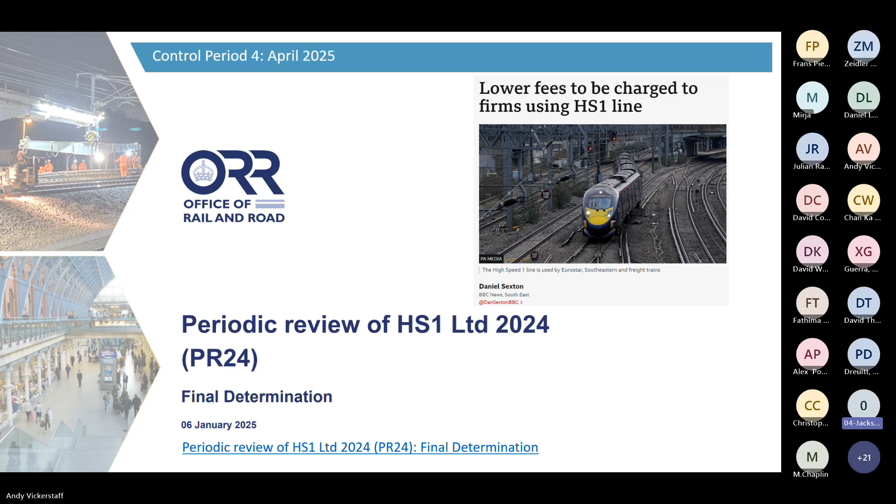I say that's nice, that's not really my bit. The idea is this railway pays for itself - that was the theory, not hugely subsidised. But anyway, we have had quite a challenge to make some savings, and there are lots of opportunities.

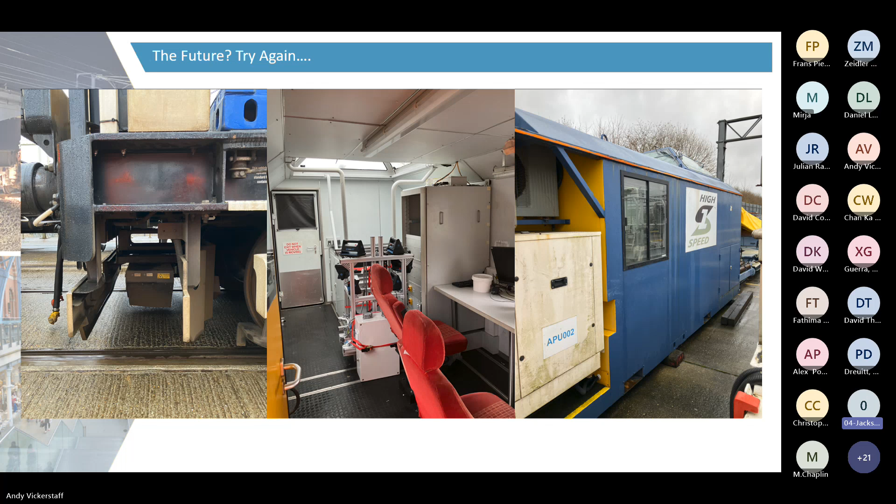But it's got stations - this is a UGMS system that's just been taken away because it's been sat in our yard for 10 years and no one knows whether it works. But we're kind of looking at this again to say, why are we still doing manual patrolling for things that we're moving. I have seen enough of this to be convinced.

So this is the AVA system, which I'm sure lots of people have seen. You need the full setup - we've had some cameras fitted in the front of passenger trains. Generally, when we've done cab riding, we've just taken a camera. They can take that data and align it all. And at least when you've done the cab ride at 300 kilometres, you go, oh, there's voiding ballast there - I'm already 1.5 kilometres away, but you can come back through the video and align it.

So it's been useful. This is the 2 class 153s, which Anglia have got, that are all singing, all dancing. You can see under there, that's 7 cameras all facing down that give you this kind of view, and you can read the marking on the castings. I know Brian Whitney, if any of you have seen his recent stuff, is saying you can see squat type defects before they're ultrasonically detectable with it. Very interesting - so yeah, they've got 2 class 153s running around trying to move away from visual inspection.

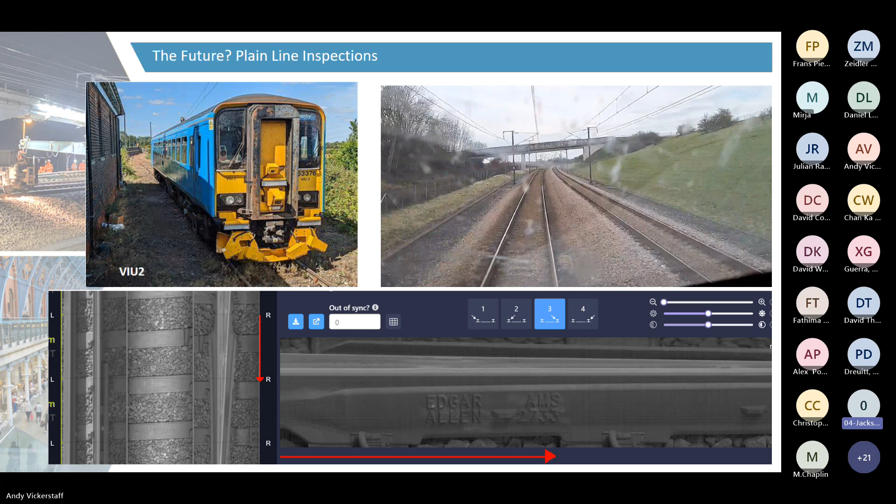We have plenty of scope to do it because, again, we're at a point where there aren't lots of failures, there aren't lots of things to find. My only concern is if you really want to move into the AI world of it finding stuff that's missing, how do you teach it if you haven't got enough stuff missing? Do we start taking clips out in the loops and things and send it through - which has been tried before.

In terms of the S&C, again, this is just a P8 gauge - this is a high-speed P8 gauge, effectively, for our high-speed sets. It has an S1002 wheel on it rather than a P8. We don't actually run any P8s, we run P12s and S1002s, which have a totally different flange angle.

Won't get into that. This is the Felix unit, which I'm sure many of you have seen - it's been rolled out in various places. This is the one that I'm about to buy one of. This is basically the Aptus laser profile, just been approved for Network Rail.

This is kind of a halfway approach. For me, this is if you've got lots of densely located junction work where you can run it around for a couple of nights and do everything. When you've got crossovers in the middle of nowhere, this will probably do most of it, and you can just take it out without having to have possessions and lots of people. Someone can go out and do it. But it's also better than someone with a calibrated fag paper doing an 053 when I have to go out the next night and MiniProf anyway.

So again, this is nothing that isn't in the press. There's a big push within HS1 to have a second international operator. So that's all in the press.

We were given a number of scenarios. Obviously, COVID, like everything, hit HS1, the whole HS1 ecosystem pretty hard. And we were in the middle of the control period, so we were already working on the next control period. It was very hard to say what future tonnages would look like.

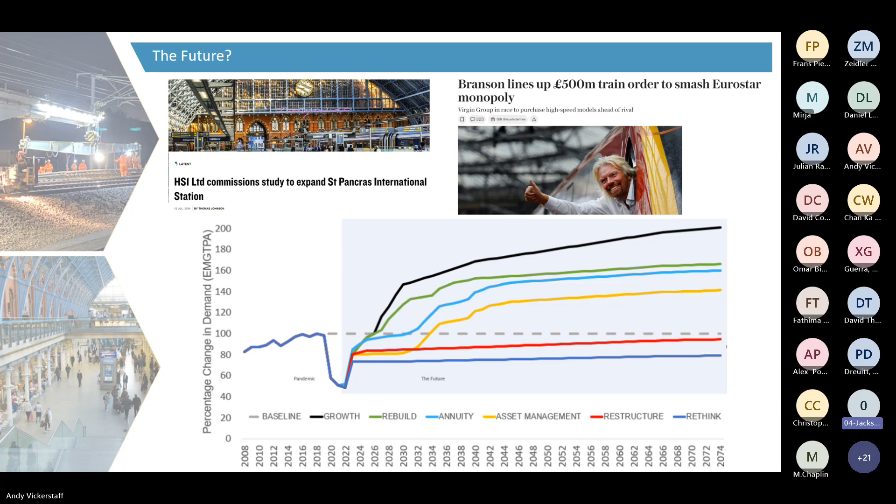So that's a bit of a whistle-stop tour, but thank you very much.

Yeah, there's some questions online. It's interesting how you've gone from everything above 400 meters freight to 1,000 meters, so it's straight. There's a couple of questions online—one about freight, but I think you've answered it because there's no freight running at the moment.

The dozens of NR60 switches—are they original design? If renewing them, do you replace them with Mark II ones? So yes, they were originally Mark 1. They now go in as Mark II, but essentially the footprint isn't too different.

One thing I probably didn't talk about is that the whole P8 is based on a 68-degree flange angle, whereas an S1002 and a P12 both have a 70-degree flange angle. So you immediately start with your switches at the wrong angle, which is something I'm looking at—whether we would move away and have a bespoke design. But one of the issues with a bespoke design is the costs go up, and are we going to order enough? Whereas we can buy standard ones off the shelf like everyone else in the country.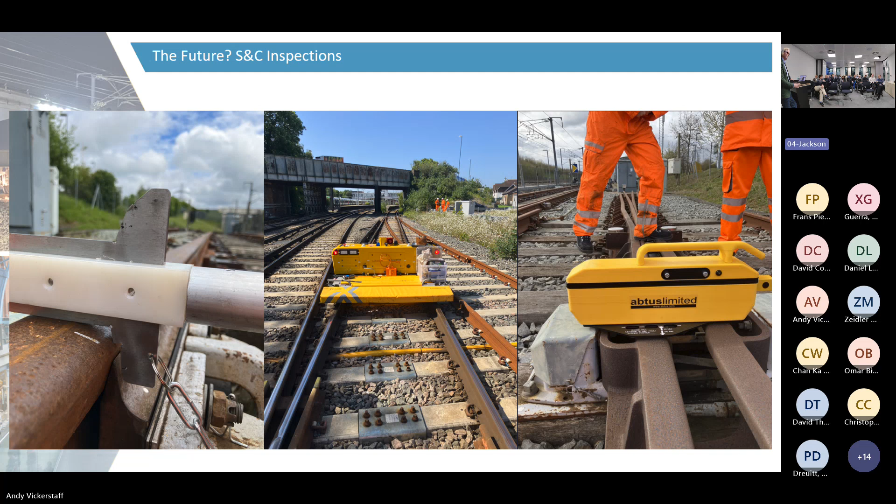There are no more questions. I think Sean... Thanks Andy, thank you very much Andy. Very interesting presentation.

We usually refer to chainage as yards and miles, but it's a meterage system. Give a good rundown on the configuration of what you've got, the numbers of switches and high-speed crossings, and high-speed swing nose crossings, and a very interesting review of the interfaces and how the railway progressed into being what it is now, in terms of both tunnel sections and why the depot is where it is.

One of the things maybe you might want to consider for your renewal strategy is, does the depot have stabling capacity for your renewal items and stuff, as well as an area for material storage? That's sort of one of the things we're learning in the Elizabeth line was re-railing, but that's a conversation for another time.

Thought-provoking really on lateral track stability. It's another approach, and I suppose it's something we all have to consider. It's obvious that climate change is occurring. How much we can move, can we go that way, or do we actually have to go wider range? Time will tell. I was interested in what you had to say about inspections and how you're developing them.